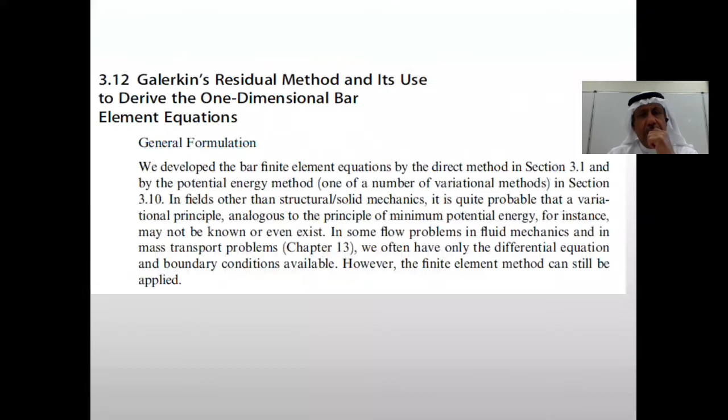Did we do part 5? No, I think I need to first do that one, and then I'll come to this presentation.

So can I stop share here? You don't need to stop share. Huh? You can just go ahead and share the other one. Okay, go new share. No, don't do it. You just exit this one and open the other side. How do you exit it? Escape, just escape, and then minimize this one.

And then where's PowerPoint? This one? No, this one. Yeah, this one. No, this one. No, this one is the one that is, no, there. This is not the one. Click this, click the one on the left. Yeah, this one? Yeah.

That's it for five. MashaAllah. Did we talk about this? A little bit, yeah, we did. Yeah. Okay, back to track. Okay.

So here, I think we need to set the structure. It is defined as nodes and members, and therefore everything is related to the nodes. So you are seeing, or you are searching, what's going to the node. If you have a node like this in the structure, basically you have to choose what are the nodes. This is what I call modeling. You are modeling the real structure by an element with 2 nodes.

And everything is coming here, so you are not worrying too much about here. You are worrying what happened to node 1 and what happened to node 2. That's all. So this load, you have to know how much of this load will go to node 1 and how much of this load will go to node 2.

We did this last time and we have an equation for it. Do you remember this? N transpose times the function of the loading, and you have to integrate between 0 to L, right? And now you will tell me how much will go to node 1 and how much will go to node 2, because if you can see this one here...

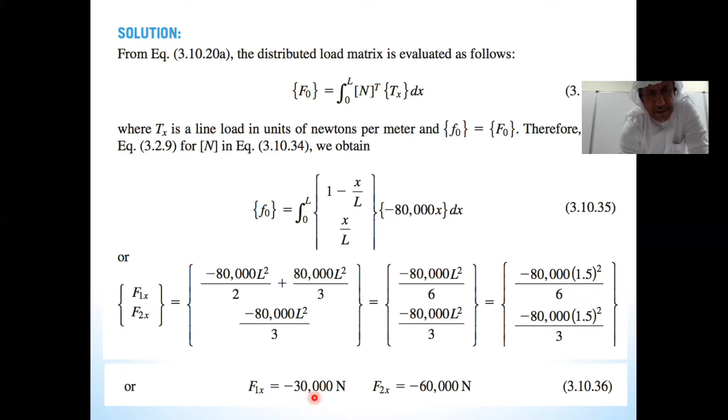So we want to solve for stresses using one element, which is a crude approximation. Not everything, anybody will give you a structure, you go and use one element, right? You are assuming, instead of beam, that you have only two nodes. What is this? No, this is not right. And you will see the answer. So we are modeling the whole cantilever by two nodes connected by a line.

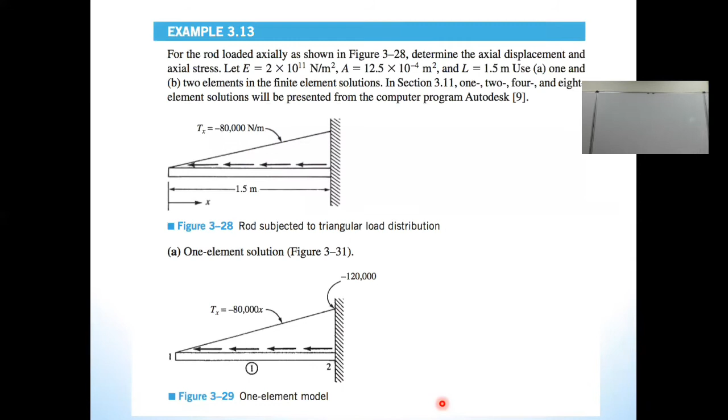So let's see, this is the load. Now what do you need to do? You need to find the stiffness. You have to go to the equation, right? What's the equation? K, right? Is it K? F global equal K global.

D, U1 and U2. That's it. Now, how many nodes? Two nodes. It means this is 2 by 2. This is 2 by 1. Very simple, it's just like one element.

So what is the stiffness? The stiffness, you know what? E A over L, 1 minus 1, minus 1, 1. And we substituted and we found this. Is this correct? The upper part, I'm talking about K1. Is this correct? Yes, okay.

What about the force? If this is node 1, and this is node 2, and this is a triangle, I think this is your X. I think the load is moving in the negative direction. So we already know how much the load at node 1 and how much the load at node 2 after integration. And the load should be here. This one is F1x, right? And this one F1y, F1, F2x.

Okay, how much is F1x? Minus 30, minus 30,000, and the other one is minus 60, right? Okay, minus 30 because x is positive here. So this one here is 30,000, and this one is what? 60,000. But since there is a fixed support, there is a reaction, right?

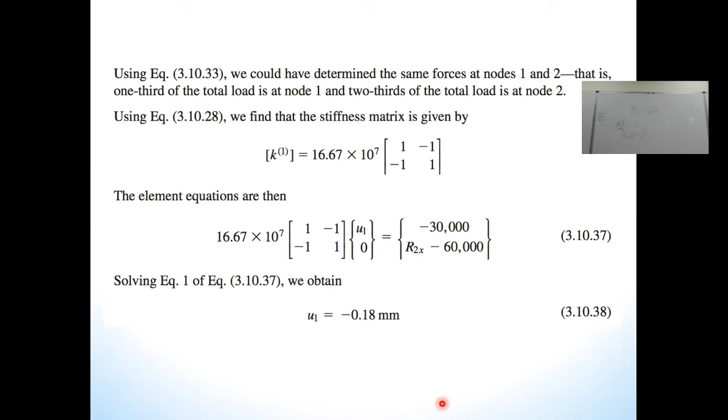The load. So this is the contribution of the load, node 1, contribution of node 2. And of course, U2 is 0. You agree U2 is 0? Yes. So how many unknowns here? We have two unknowns, right? Or one unknown? Two unknowns. But you want to solve for the primary unknown, which is what? U1. Forget about reaction. So for U1, you just multiply this row by this column equal to minus 30 and solve for U1. Go substitute U1 and find the reaction. Okay?

How do you calculate stresses? Now you found the reaction. Okay, we are interested in stresses. Do you know stresses? Yeah. Stress, which is a scalar, equal E times epsilon.

E, what is epsilon? We said you have to remember B times what? Times D, or U vector D, displacement. Okay, this is a scalar. This is scalar. How do you make the product of this a scalar? B and D, one has to be a row and the other one has to be a column. So this is why, B, what is B? The derivative of the shape function.

From now on, that's until the end of the semester, if I say B, you will say derivative of the shape function. So it's E, the derivative of N1. Do you know what's N1? N1 is what? 1 minus X over L? And N2? X over L. So what's the derivative of N with respect to X? Minus 1 over L. And the other one is 1 over L.

And now, what about the displacement? U1 and U2. This U2 is 0, so you multiply this row by this column, and already you found U1 from the previous slide. You put it here, and you get 24 megapascal.

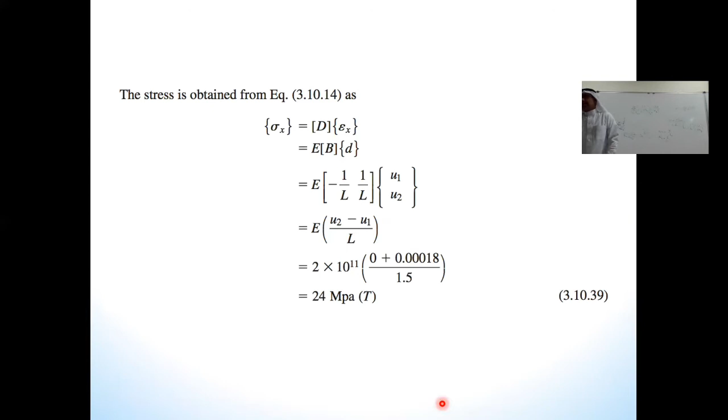This 24, the stress in the cantilever, it doesn't make sense, right? If you have a cantilever, and you said that this will go bending like this with the load. First of all, we are assuming that the stress is uniform. The stress at the free end is the same as the stress at the fixed support because you use one member. Does it make sense? This is crucial, right? We know that the cantilever has maximum moment here. So the stress here is higher than the stress here. If you plot bending moment, this is from strength of materials, sigma equal minus M y over I, right?

So the maximum stress will be at the fixed support and minimum will be at the free end. How much do we have? 24, and it is tension.

Now, how do you improve the answer? Take more elements. So what is your next step? Two elements? Divide into two elements? Let's divide to 2 elements. Let's see what would happen if we divide this to 2 elements.

Okay, here is 2 elements. How many nodes? 3. So your K will be 3 by 3. Very simple, but now you have to understand that the length for each one is 1.5 divided by 2. So we first obtain the element force.

Can you tell me what would be the force in node 1, node 2, node 3 now? It would be different now. There are 2 functions. For element number 1, you have to use this. For element number 2, you have to use this. This is one function, and this is one function.

And you have to integrate from 0 to L, which is 0.75. And the other one will be from where? From 0.75 to 1.5. Are you sure? Not from 0 to 0.75? No, already done it, Sasha.

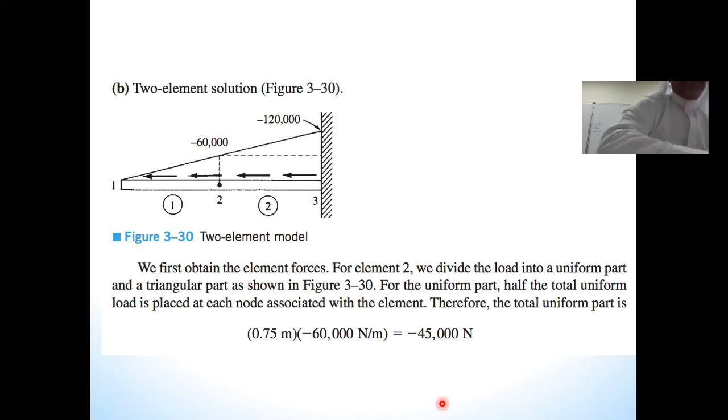Okay, if this is what you say, let us see. Now, what is this? Can you tell me? It looks hard to understand, but you see, the load at node 1 is minus 7,500, and the load at node 2 is this plus this. Anybody can tell me what's happening here?

No idea. No idea. Anybody? Give us 5 minutes. You just take the distributed load. This is statics, CE 201.

You just take the resultant and throw it to the node. So you come to this element and put a triangle. You come to this element and put a trapezoid, right? This one is 30,000, because this one is 60,000. This is 60,000, and this is 30,000. Is this correct? Yep, 60,000.

The length here is what? 0.75. The length here is 0.75. This is node 1, this is node 2. This is node 2, and this is node 3. So at node 2, there would be contribution from element 1 and from element 2.

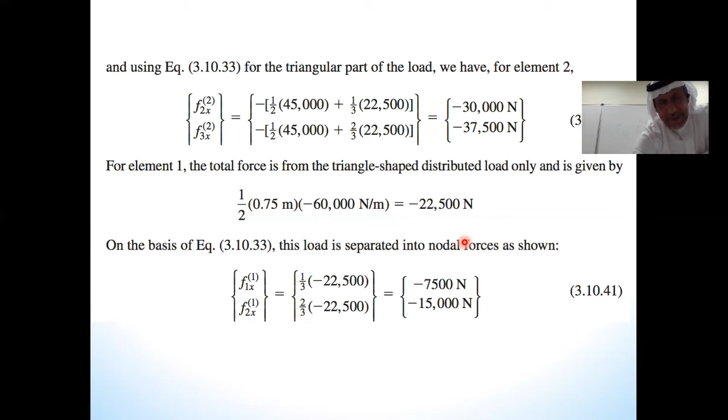For the triangle, 1/3 and 2/3. That's exactly what's happening here. Look at the bottom. 3.10.41. Did you see 1/3? Did you see 2/3? What is this? This is the total load, 22.5.

The area of the triangle: half of the base times the height. How much? 22,500? Half of 0.75 times 30,000. Is it 60,000? What? 60,000? 50,000? It's not 30,000.

60,000. Where is it? Oh yeah, 60,000. And 120. 60 and 120 there. Where are you? You should tell me if I make a mistake, right? 60,000, right? Yeah, right. 120?

No, 60,000 times 0.75 divided by 2. Is it going to be 20? Yes, yeah, okay, makes sense. Okay, thank you. So 1/3, 2/3, we already know it.

So what are the loads here? Is it to the right or to the left? To the left. Okay, what about here for node 2? To the left. Reaction, right? Yeah, reaction. Okay.

How much did you say? How much here? Load. How much for node 1? Minus 7,500. Okay, this one: minus 15,000. 150? No, 15,000. This one: 30,000, minus 30,000. You understand?

I don't want to go to these trivial things. Come on, right? 60,000 times 0.75 divided by 2, and then 1/3 of this. So how much total here? Minus 30,000. No, without minus.

I know it's to the left. How much? 30,000. Okay, how much here? 37,500. 30? 7,500. 7,500. 37,000? 37? Yeah.

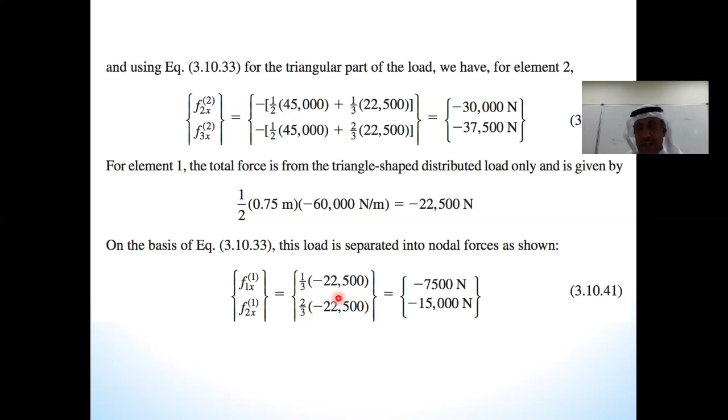Go ahead. Okay, great. Thank you. So this one here, wow, this is exactly what we have on the board. You see, F1, F2, contribution from, and this one is the reaction, and this one. Okay, look at K1 and K2, they are the same, and you get K.

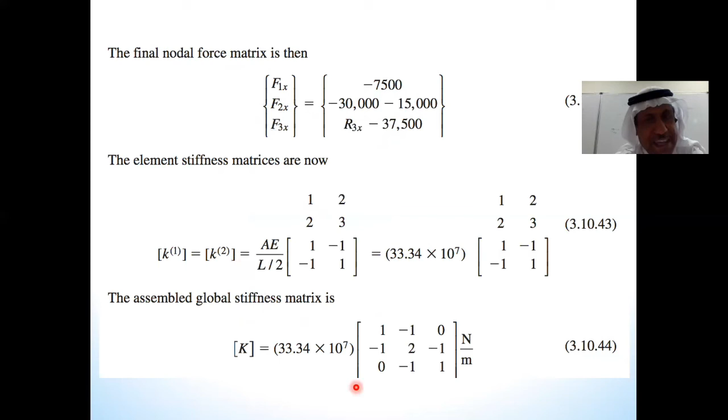Finally, we got this: K times U1, U2, U3 equals the forces, right? Can you find the unknown U1 and U2? Okay, you take this matrix, is it? Which one? This matrix?

Partition, take this one: 1 minus 1, minus 1, 2, times U1, U2, equal to this and this. No reaction involved. You solve for U1, solve for U2, then you can find the reaction. Okay, how do you find the stresses?

Now we have two elements. I need to know how much the stress is in element number 1 and the stress in element number 2. How do you find it?

Okay, tell me. All you need is U1, U2, U3. U3 is 0. Can you tell me how much U1 is? Minus 0.18. Yeah, and the other one? Minus 0.75... 0.1575. Okay, how can you find sigma 1, sigma at element number 1?

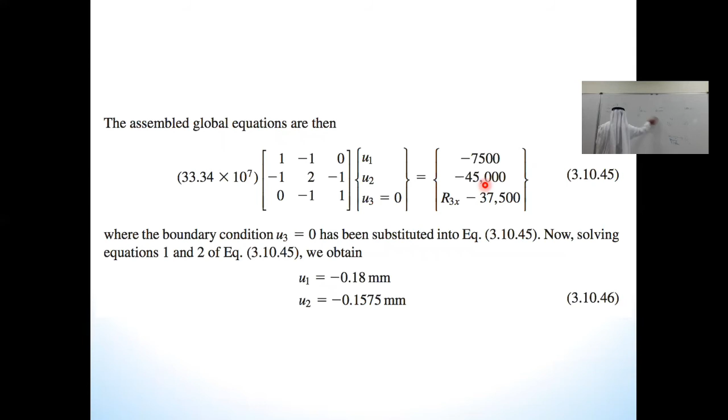We just erased it. Sigma equals E times epsilon. Epsilon equals B times the displacement. Okay, for element number 2, sigma for element number 1 will be E times epsilon of element number 1. It will be E times B times D.

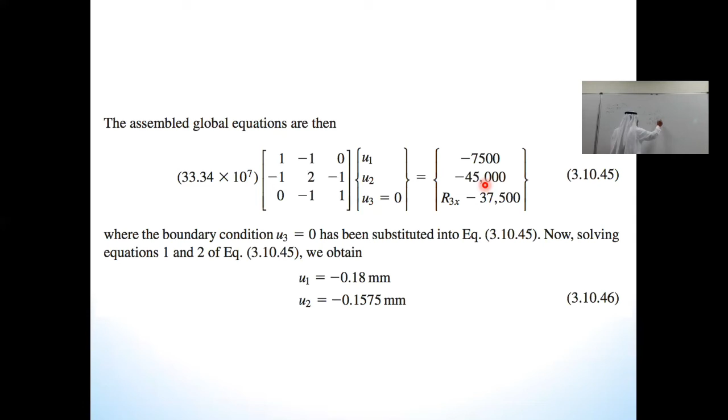Okay, this one will be E, and this we already know: 1 over L, minus 1 over L. Now what about the D? U1 and U2. Exactly, U1 and U2. That's it. What is L? L is 0.75. That will give you sigma.

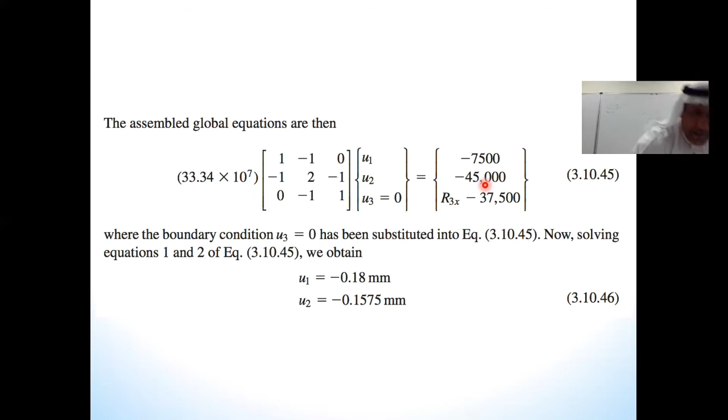Can you repeat this for element number 2? U2 and U3. Okay, let's see the stresses. You must be anxious to see what happened to the stresses. Wow, stress in element number 1 is 6, and stress in element number 2 is 42.

How much was it when we used one element? 24? Average them: 6 plus 42 divided by 2 is 24. But it is better, at least for element number 1, instead of 24, 6 is smaller than 24.

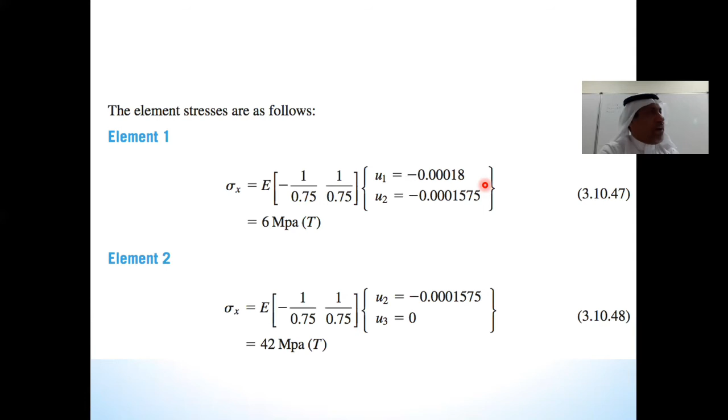And as you go toward the support, which is element number 2, it is getting higher, 42, instead of 24. Oh, what do you want to increase now? Yes. If we increase the elements, it would be even more and more accurate.

In fact, the stress here, if you plot it, will be curved. At the tip it's 0, and it's going like this. This is the fixed support.

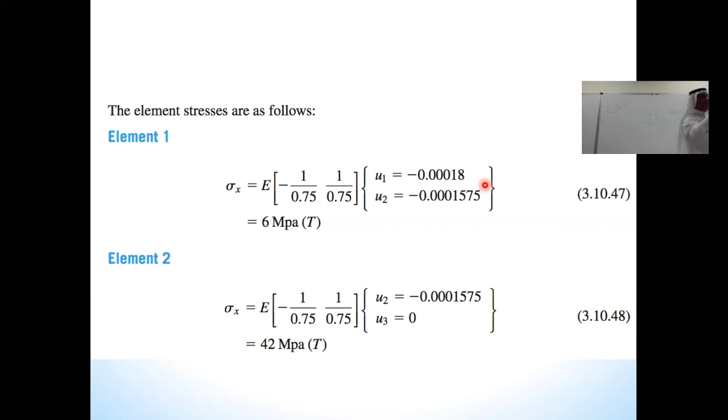Remember, for one element, we got 24. For 2 elements, we get 6 and 42. At the end, we want to see stairs, right? Like this. If you divide it into many elements, you are going to approximate this parabola by piecewise segments. Do we have that? Yes, we have it.

So even in software, when we use a large mesh, the triangles become like a stair instead of a triangle. So when you use a mesh, it means you are increasing the number of elements. If you make the segments bigger, you end up with a stair instead of a triangle. So it's better to use a finer mesh.

Okay, now I ask you to go to COMSOL or Abaqus and run this problem, and you get very good colors. How do you check if your answer is correct?

Use your sense. My sense is okay. My sense says this is okay, and then I'll shake my head—this result is so good. I'm glad. Don't use your sense. You have to.

Logic sense. No, but he is right. If you get high stresses at the tip, this doesn't make sense. You know how to expect that the stress will be higher and higher as you go. But now you'll ask the quantity, the values, whether they are correct.

How do you check your values? You have to go to closed form analytical, and you compare analytical with the numerical. And for cantilever, you know how to do it.

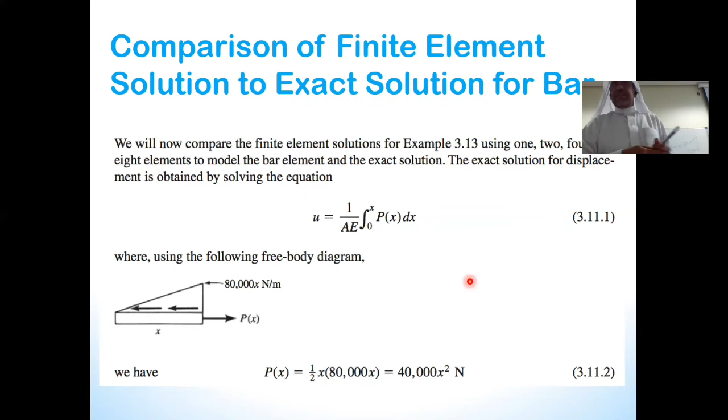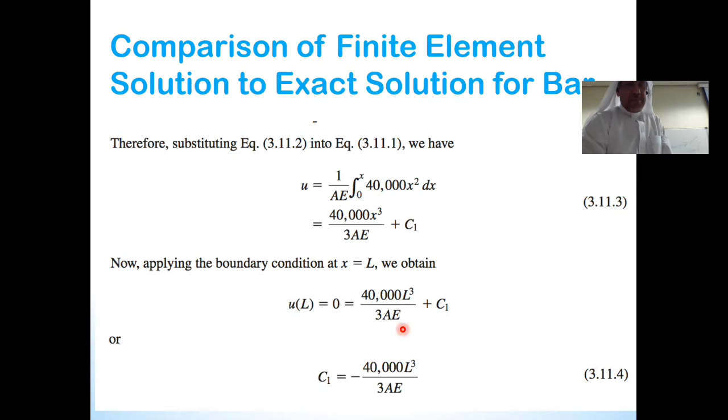When you integrate, you have to have a constant, and the constant from the boundary condition. Already you know the displacement at x equal to 1.5 is equal to 0. He's integrating and he's putting C1. And it says here, the condition at x equal to L, U equal to 0. He found C1, take C1, put it back here. Then you will have U as a function of x.

See? Look at U, this is U closed form. And this is the stress closed form. This is the analytical result for U and for stress, which is changing with x.

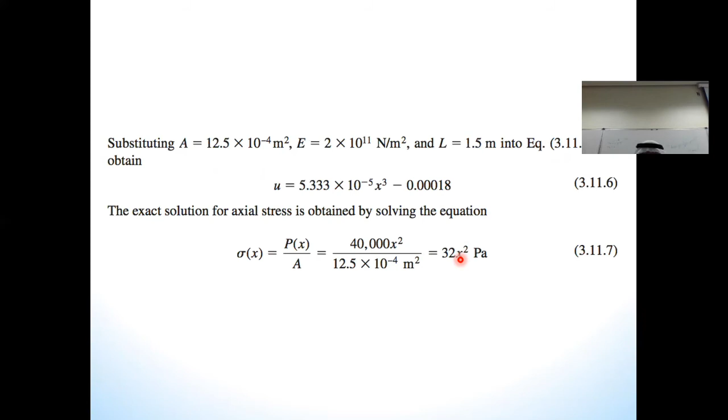Okay, now let's go to finite element. Let's draw for finite element when we have 1 element, 2 elements, 4 elements, 8 elements, and we see how closer we get to the exact. We will call this the exact solution. The analytical, let's call it the exact solution. Wow, look at here, what is this?

Displacement in meters. Okay, when you use one element, it gives you this curve. What does this mean? It's linear. Okay, if you use 2 elements, it will be bilinear.

When you use 8 elements, you are approximating the curve with piecewise, right? But look at the exact - exact is what? It's a curve, parabola, x cubed, right? So which one do you think is a good solution? It's not good compared to the analytical one, okay?

Yeah, because this is crucial. The first one, you are saying that the contribution is only 2 nodes. The second one, you are saying the contribution is maybe 9 nodes, okay?

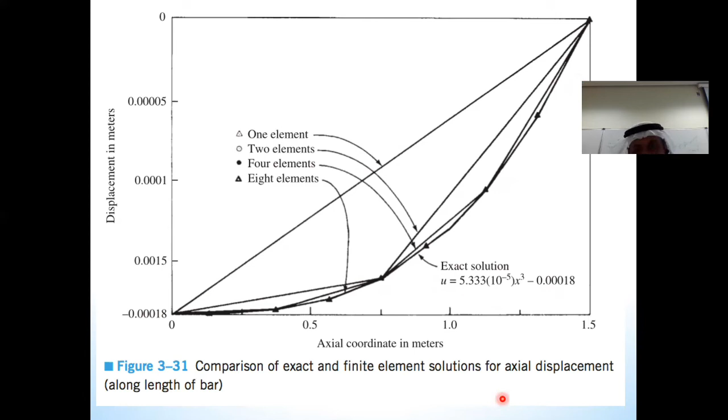Very interesting. So 8 elements is good? You think 8 elements is good? No, we have to go more. We have to go more than 8?

The finite element solution matches the exact solution at the node points. It's satisfied there, of course with the boundary condition applied. The reason the nodal degree of freedom values are exact is because we use that approach.

Although the node values for displacement match the exact solution, the values at locations between the nodes are poor, using finite elements for 1 element and 2 elements. We see the departure from the exact solution.

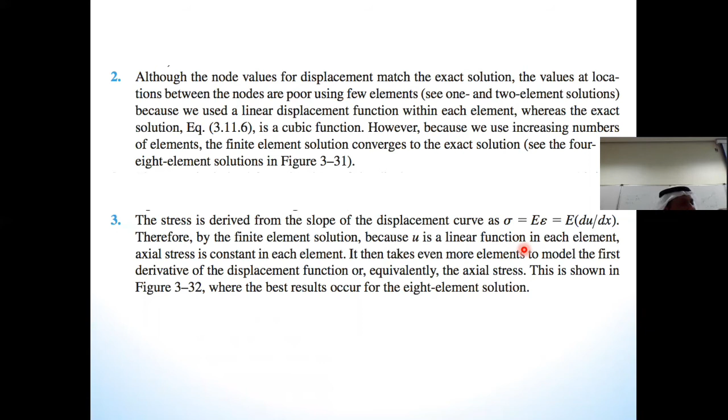The stress is derived from the slope of the displacement curve. By finite element, because u is linear, what is the derivative of u? Constant. That's why stress is constant, because u is assumed linear. For this element, if you use 1 element, the displacement is linear. If you choose to divide into elements, it's linear over each element - linear here, linear here, linear here.

This is very, very important - it gathers everything. When you use 1 element, you see stress is 24 for 1 element. How much is the length of the element? From 0 to 1.5 - this is 1 element.

Where is the 2 element case? Did you see the 2 elements? Yeah, and this is 4, and this is 42. Okay, 8 elements - 1, 2, 3, 4, maybe 5, 6, 7, 8. Very good, 8 is the dot here - see the dot, the circle?

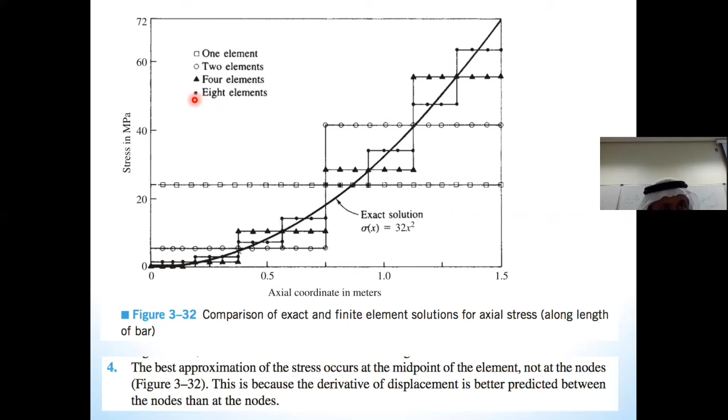So 8 elements - is that good? Not good, not good. So you have to go to maybe 16.

Over. Sorry, the problem with running the software - it will take time. But you want to solve the problem, right? It will take more time, but if we go more and more, like 16 elements. What about your project? You're not going to solve just a cantilever - you will solve a problem that might take overnight calculation.

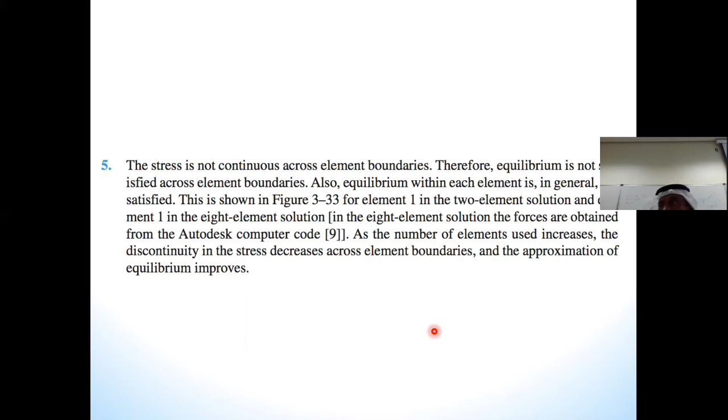Wait until you graduate and finish this course. This is just a simple example, right? And this is using linear elastic analysis - you're not going into non-linear.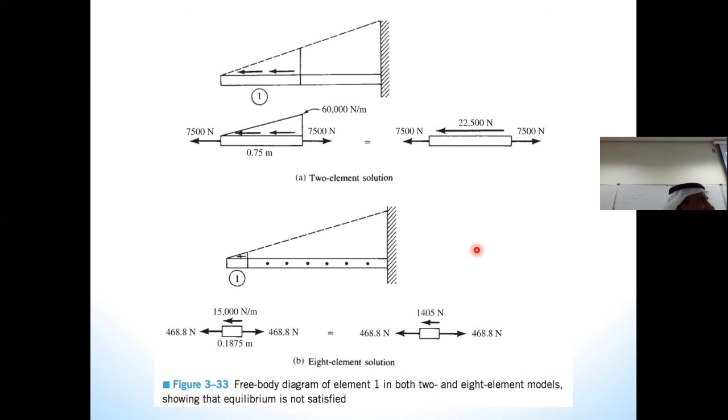Now suppose you're working in a company and they have a problem in a machine and they say come analyze it. You go to COMSOL or Abaqus and make a model. You say, I learned this from CE 517, and you do your analysis and show it to your boss. Your boss asks what kind of analysis you used. You tell him you used elastic analysis. He says, how come? There's a failure there - it already goes into the plastic range, plasticity. You have to include plasticity, because you're outside the elastic range.

Now what about the software - do they have that? Yes, they have that. Do you understand plasticity? Where did you take plasticity, in 510? If you say no, I can offer a course called plasticity, because my PhD was in plasticity. I'm mechanical - almost half mechanical, half civil. I used to offer this course about plasticity.

Not only plasticity, I can model this as damage. Have you heard about damage mechanics? Fracture and things like that - you can model the material damaging. Every time you put a load, you damage part of it, you create voids in the element, and as you create voids you make it more damaged. It accumulates. These are advanced topics.

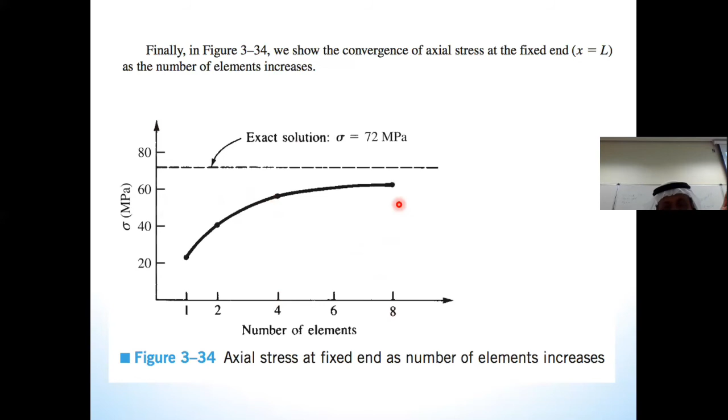Okay, so we'll take attendance today. We have 4 elements. When you have 4 elements, we have 60, and with 8 elements, still 8 elements, it's close, but it's not that close.

Okay, what is this here? It's equilibrium, right? This is for when you choose one element. This is 0 here, and you want to draw free body, but this is very important. Whenever you calculate stresses, you have to make sure that your element is in equilibrium, because if it's not in equilibrium, you will have a problem. This is kind of a check for your answer and your result. Convert stresses to forces and isolate the element and see if it is in equilibrium, okay?

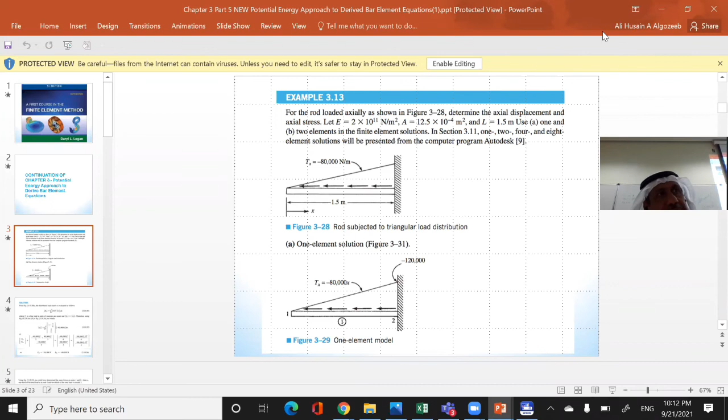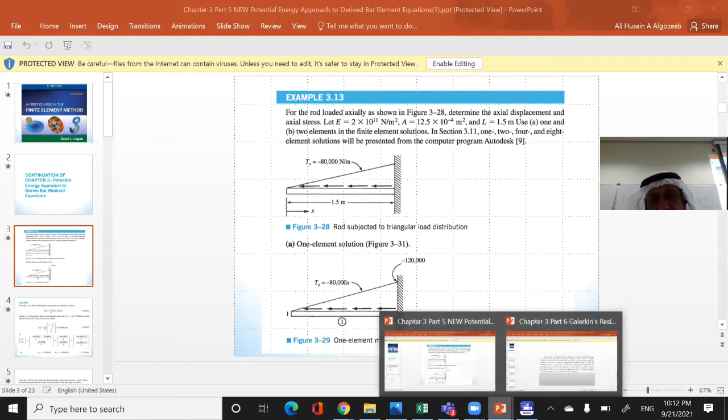Now let's move to something else. What should I stop share, so that I can continue? I can continue, so I just come here and click on this one. It's sharing the entire screen, not the window. Is this the one? Yeah, this one? Okay.

This one is very interesting. What are the 3 methods to calculate the stiffness? One of them is the direct method. The other method is, potential, pi with u1 and pi with u2, and then you find 2 by 2. What's the third method? Galerkin. This is what we want to do tonight. We want to derive the stiffness for the bar element using the Galerkin method.

And I think you know the answer. What's the answer? What's the stiffness for the rod? K will be EA over L, 1 minus 1, minus 1, 1, like that.

Now, although the Galerkin method we are going to do it for the rod, we are going to use it to derive it for the beam. If you understand it now, you will have an easy time. Very important, and normally it comes in the exam, the Galerkin method.

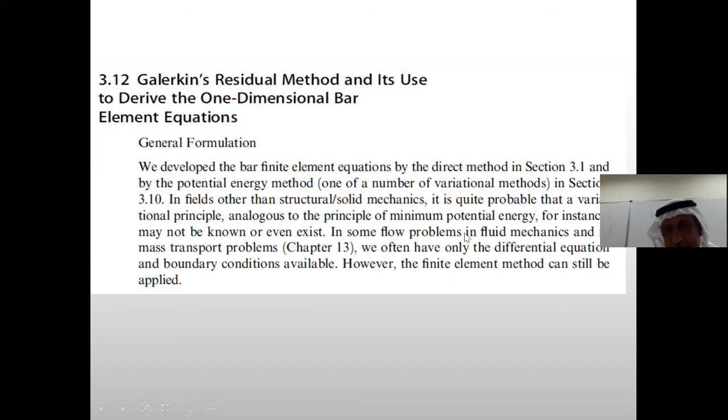So they have to use other methods. What is the other method? Exactly. You see, in some flow problems, what is the water? In flow, porous media, the movement of oil in the rocks, okay? All of this is a flow problem. So in flow problems, fluid mechanics, and in mass transport...

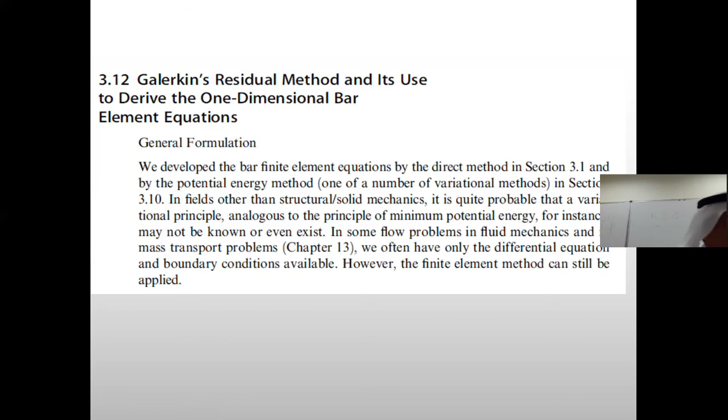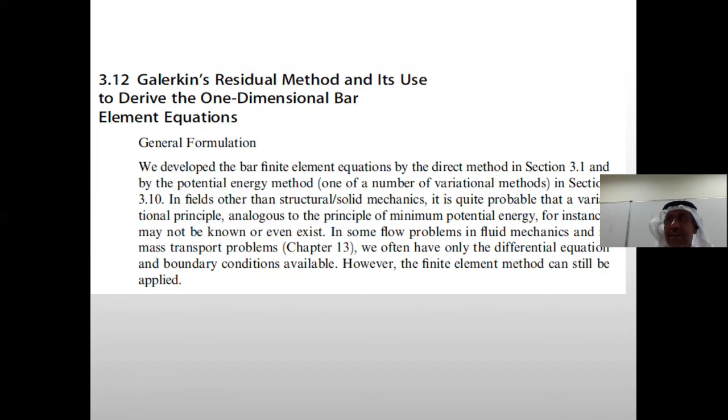like heat transfer. Okay, do we have mass transport in civil engineering? What is it? Traffic, okay. What else? Evaporation of the concrete, right? Chloride going inside, corrosion. This is called mass transport.

So in mass transport, I'll give you, okay, give me potential energy for mass transport. There's no potential energy. There is only differential equation. So how to get the stiffness? You have to use Galerkin method. See how powerful it is? You cannot escape from it, right?

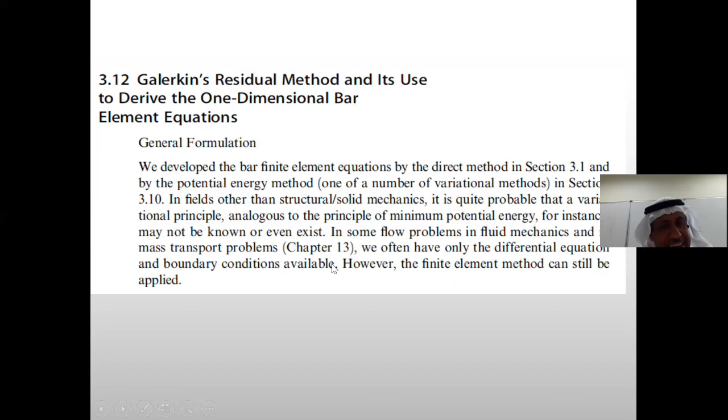You cannot escape. We often have only the differential equation and boundary condition. However, the finite element method still applies. The method of weighted residual applied directly to differential equations is used to develop finite elements. In this section, we describe the Galerkin residual method in general and then apply it to the bar.

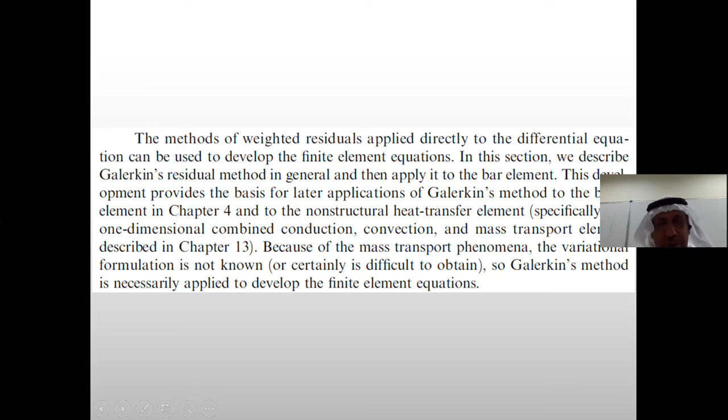So we'll explain it in general and then we have an example. Okay, if we can get EA over L times 1, minus 1, minus 1, 1 tonight, we'll be happy. The development provides the basis for later application of Galerkin method to beam elements in chapter 4, and to the non-structural heat transfer and mass transport elements in chapter 13.

Because of the mass transport phenomena, the variational principle is not known, so Galerkin method is necessary to apply for the development. You understand now why Galerkin method is important? Yeah, okay, because in some cases we don't have it. This is it. Everything is in this slide.

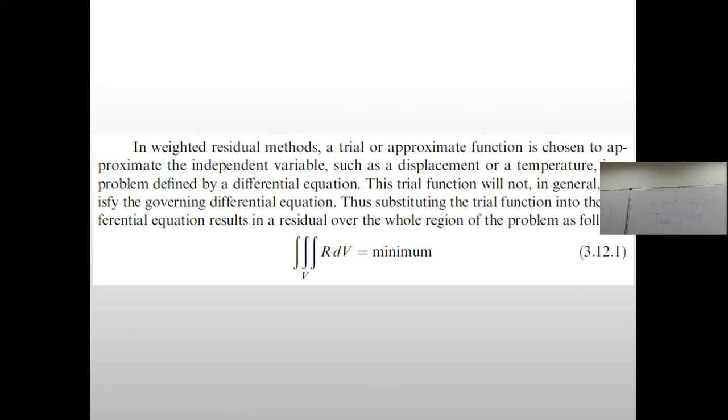You see the residual R, the one I put on the board? You have to integrate the residual over the volume and make it equal to 0. It's true that R is not 0 because you put in the approximate function. But now take the residual here, integrate over the volume, and equate it to 0. That will give you the stiffness. So you are looking for the stiffness which will make the error over the whole volume equal to 0. It may not be equal to 0 over a small element, but over the whole structure it will be equal to 0. So what is this R here?

Okay, so let's read this, please. The weighted residual method: a trial or approximate function is chosen to approximate the independent variable, like u bar.

It's not exact, such as displacement or temperature in a problem defined by differential equation. The trial function will not in general satisfy the governing differential equation. Of course, there is an error. Thus, substituting the trial function, U bar, in the differential equation results in residual R over the whole region. Take this R and you have to make it minimum.

One of the conditions to make it minimum is to put it equal to what? 0, right? You see, when you put it equal to 0, then that's it. That's Galerkin method.

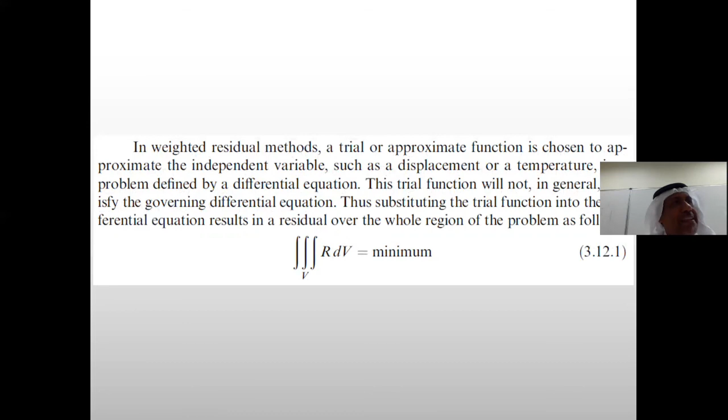Okay, in the residual method, we require the weighted value of the residual. What's the difference between this one and this one? Did you see anything? Ah, the W, right? Did you see it? Here, not there. Here.

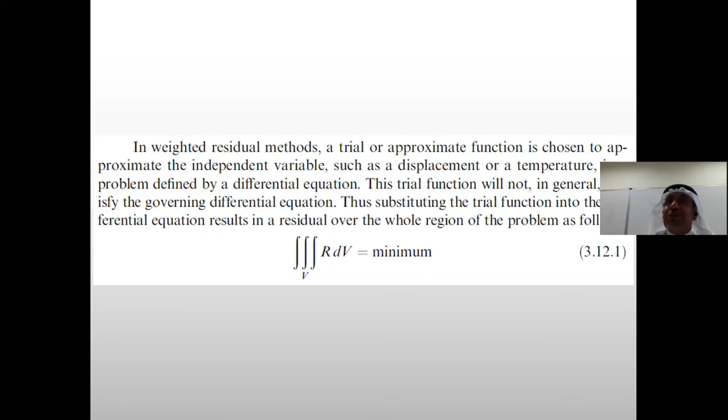This one has no W. This one, you want to minimize the residual over the volume. But to make it 0, you cannot just simply take minimum and put 0. It's not up to you. You just put 0 -- you have to do some work. You have to multiply it by W and then put 0.

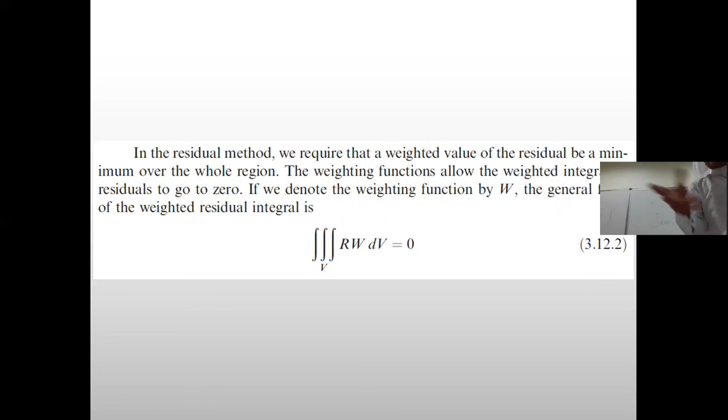What is this W? This W is weighted function. Weighted function like alpha, beta, gamma, weighting. Just like interpolation function -- you remember the interpolation function? Yeah, that's it. This is like interpolation function. This W is not necessarily scalar. It can be a function of space, function of X.

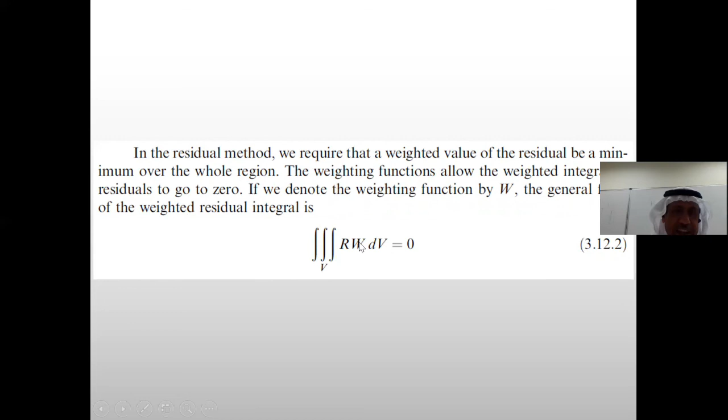So, still we don't see Galerkin. We only see the concept, right? Using Galerkin method -- Galerkin method says, okay, I am going to put instead of W, which is the weighted function, I'm going to put the shape function. He's so clever. He said, why don't I use N1, N2? That's it. So this equation becomes like what?

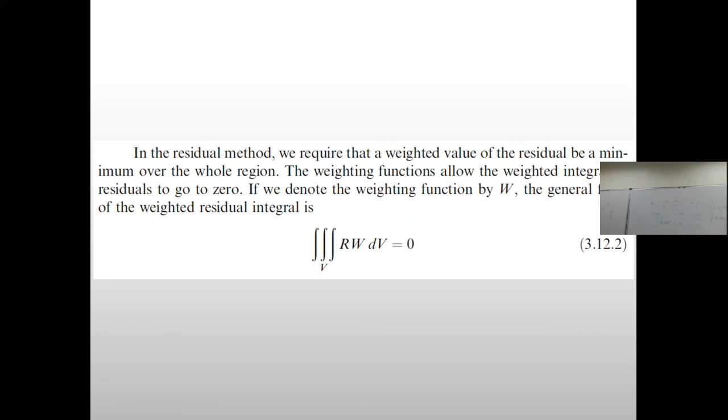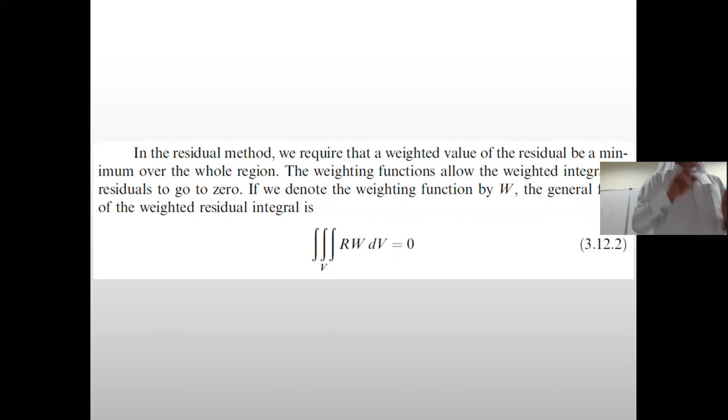2 equations, because you can integrate R N1 dx from 0 to L, this is equal to 0, and then R N2 dx equal to 0 from 0 to L, that will give you another equation. And then you can generate the stiffness, okay? Because this one here is Wi, which means for each node. So you are going to make minimization of the error at each node to be equal to 0.

And he said, okay, using Galerkin method, we choose the interpolation function, such as this in terms of, instead of W, Ni, which is the shape function. And already you know the shape function, 1 minus x over L and x over L. Okay, and look here, he says R Ni, i equal 1, 2. It means 2 equations, right?

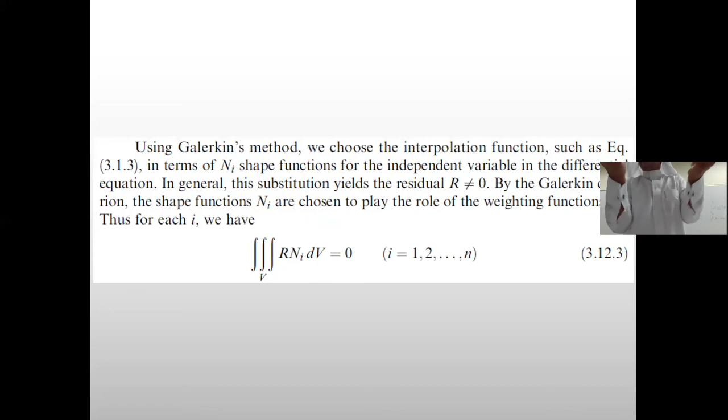What's written on the board is 1, 2, 3, depending on how many nodes, okay? So it means if you have a structure with 100 nodes, it will be 100 equations. But for one element, it will be 2, right? For the rod, because you are talking about the stiffness of the rod with 2 nodes, right?

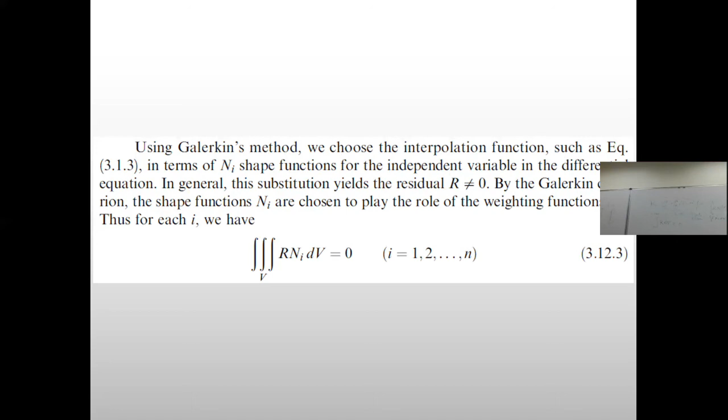So this one here, you are going to minimize this not over the whole structure, but over the element. You are minimizing over this element, minimizing over this element, minimizing over this element -- independently. And therefore, this is why you have stiffness here, stiffness here, stiffness here.

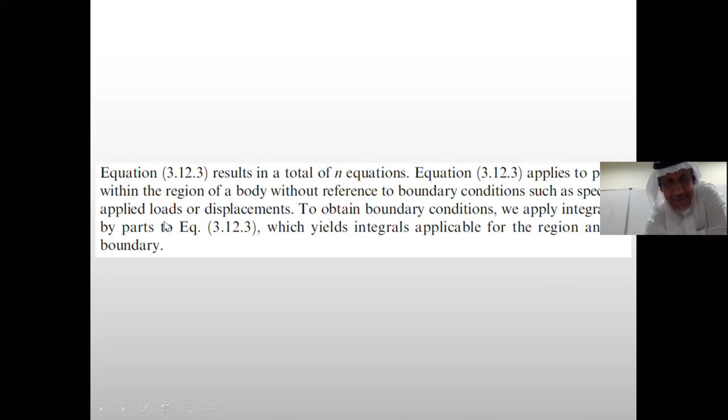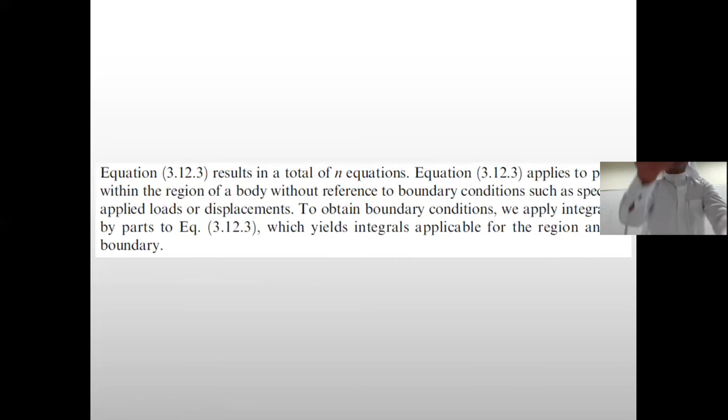This equation results in a total of n equations. In our case, it results in 2 equations applied to the node. To obtain the boundary, we apply integration by parts. Do you know integration by parts? Yes. By the way, Galerkin method always uses integration by parts.

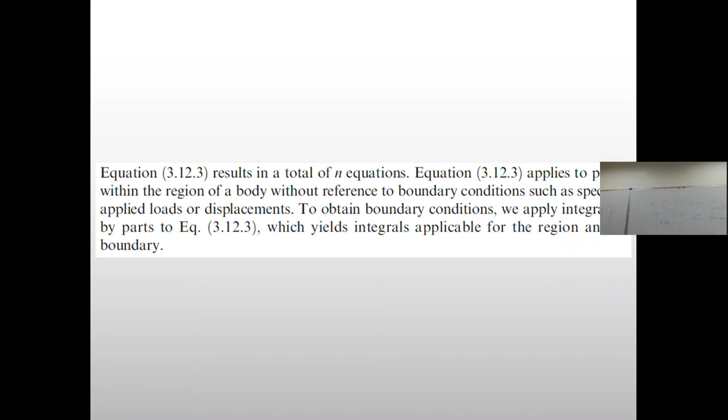Because why do you have to integrate by parts? You have to have the differential equation, and when you integrate the differential equation, you reduce the order, right? If it is dy dx and you integrate it, it becomes y, right? So this is why you have to do integration by parts -- so you reduce the order.

What is A? What is du dx? Strain -- take strain multiplied by E, epsilon, right? Strain times E is what? Sigma. Sigma times A is force. In the rod, the force is constant. So when you take the derivative of the tension force, it should be equal to 0.

MashaAllah, see how they find a differential equation for the rod? This is the tension, T. If you have a rod with this node and this node, truss element,

tension here equal constant, such that dt/dx equal to 0. The derivative of a constant value is 0. This one here is t. You take the derivative, it will be 0.

Okay, let's do integration by parts. That's it, do it, okay? Integration by parts, so that's it. U dv, we separate it. U will be N_i, and dv is this. This is what you have inside the integral. You have this quantity and this.

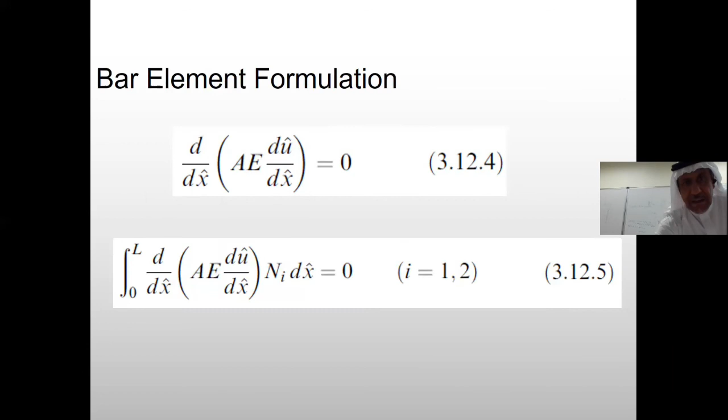Is that right? That's what you have. Okay, let me convince you again. See? Which one is u? N_i. And dv will be d/dx, EA du/dx, dx.

Okay? So if you integrate by parts, look, if you integrate by parts, what happens if you integrate by parts? You have to equate it to 0. It means what? U dv equal to 0. It means uv minus integration of v du equals 0.

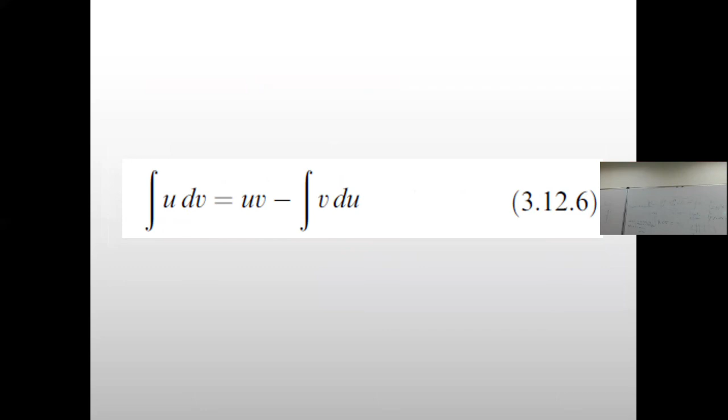Integration of u dv should be equal to 0. So it means the right hand side, uv minus integration of v du equals what? 0. Yes, it's equal to 0. So this one here is uv minus integration of v du. Okay, how many equations is this?

How many equations is this? Watch the I. The I, we said, means how many equations? 2 equations. Did you see it here? Not here, it's here. So this is I. This one will give you 2 equations.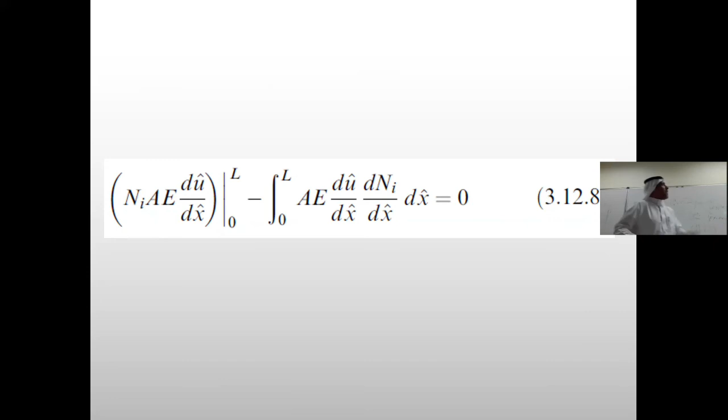Can you tell me the first term, how it would be for node 1? Just tell me what would be this for node 1, and then I will finish the rest. So what do you do? For node when I equal to 1, you replace I by 1. Okay, replace I by 1. So it will be what?

N1, EA, and then what? du dx. But u, we said du. What is u? U is N1 u1 plus N2 u2, right? And then what? And then we put the limit from 0 to L.

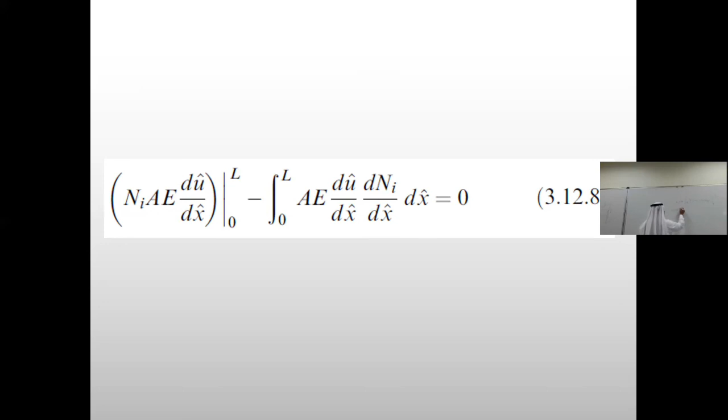Okay, N1 EA. Can you take the derivative here? It would be the derivative. U1 is not a function of x, U1 is an unknown value. It will be dN1 dx. You already know the derivative of the shape function. So it would be what?

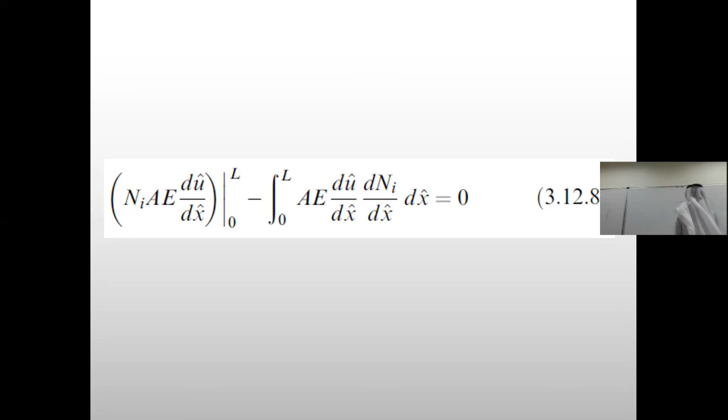Minus 1 over L, U1, this one plus 1 over L, U2, right? And this from 0 to L. Yalla, evaluate. Can you evaluate?

Put L. Can you put L? The first, how much the value of N1 at L? 1 minus 1, 0.

How much the value of N1 at L? 0, because N1 is varying like this. This is node 1, this is node 2. It has a value of 1 at node 1 and has the value of 0 at node 2, which is L. So the value of N1 at L equal to 0. So you are multiplying 0 by all of this, it will be 0.

Minus, now put the other limit, 0. What is the value of N1? 1. EA. Then can I put minus 1 over L and 1 over L, and I put U1 and U2? Can I put it like this?

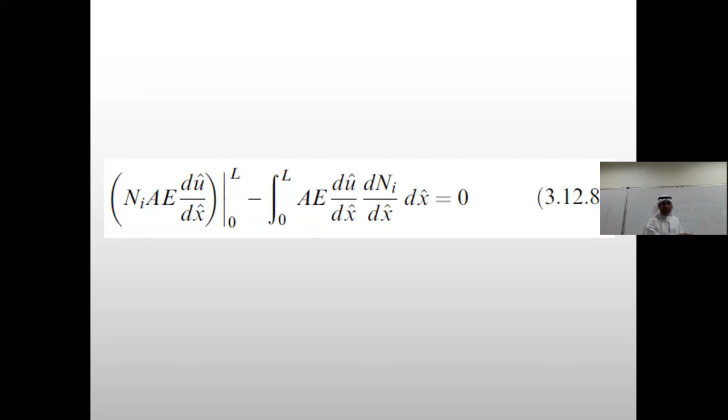Okay, have you noticed something? There is EA and there is L, which we will put outside. And there is 1 here and minus 1. Okay, let's see what happened to these equations. So you see, that's exactly what we have. So when we do this and put the limit, we get this equation here.

So N1 equal to 0 at X equal to L, N1 equal to 1 at X equal to 0, so we get this equation. What is this equation? This is for N1. Can you repeat things for N2? You just put here instead of N1, N2, and instead of N1 here, you put N2. You get another equation like this. Where is it? It's here.

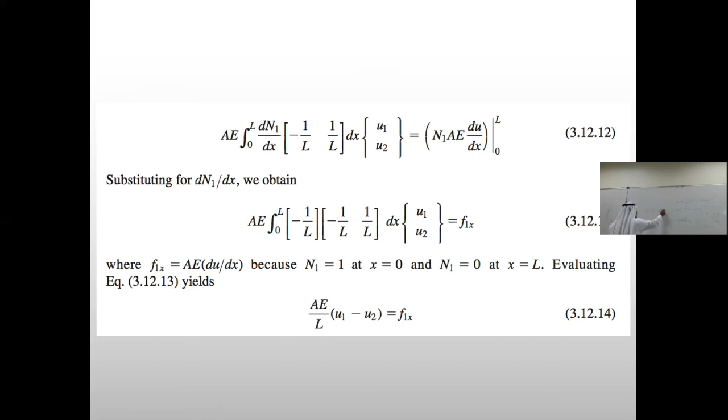Okay, let's put the first equation. So from when you put N1, can you tell me what is this one here? That is not N1. AE over L, EA over L, U1 minus U2 equal F1X. Okay, what about if we put instead of N1, N2? Okay, EA over L, U2 minus U1, F2X.

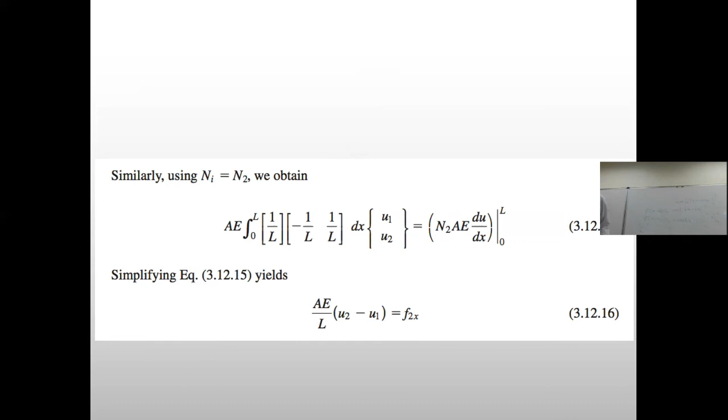Okay, can you put it in a matrix form? F1X, F2X equals something times U1, U2. What? 1, minus 1, minus 1, 1. Is that right? Do you agree? He's right. Okay, good. So we got it.

Let's see. Very good. So how many minutes do we have?

This is the other ones, the other methods. Here we integrate what? We take the residual. We said minimization over the volume, that is what is called Galerkin.

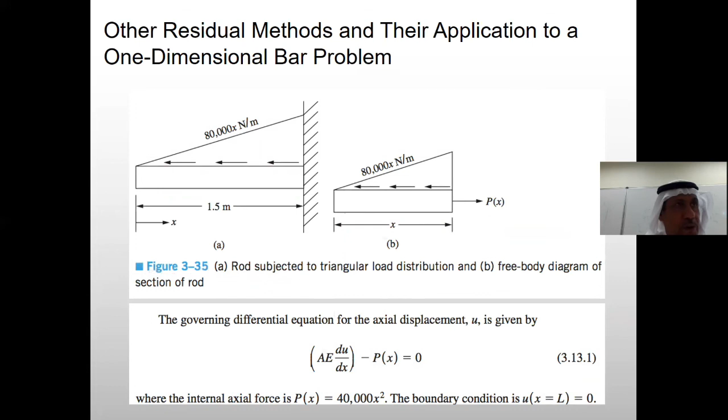There is another method, it's called... you see this one here, you are going to use collocation method, where you are going to satisfy it at a certain point. We'll talk about it next class. I don't want to rush it, but it is easy.

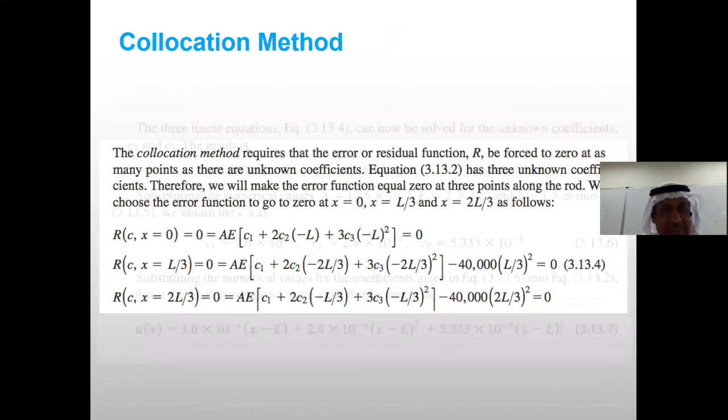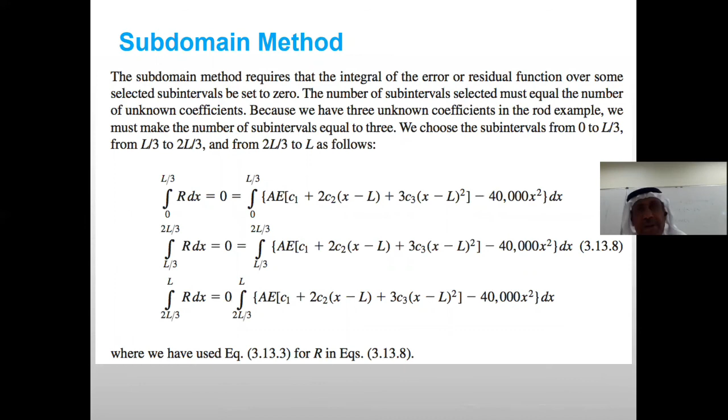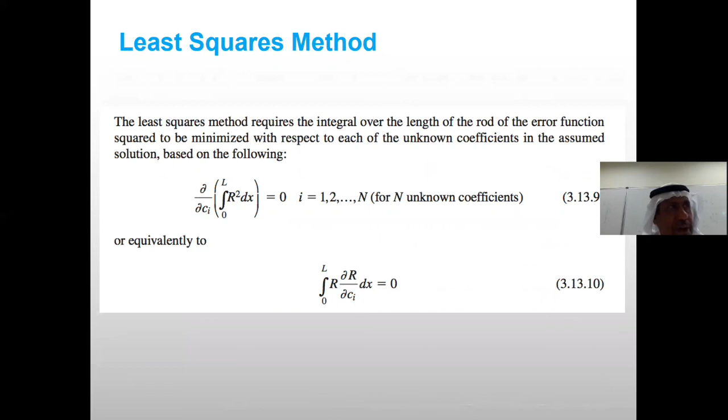So we'll talk about this, but the most important, and then least square. Have you heard about least square method? It's a numerical method, we will use it here. Anyway, forget about this other method, I have to review it after you come back from the break.

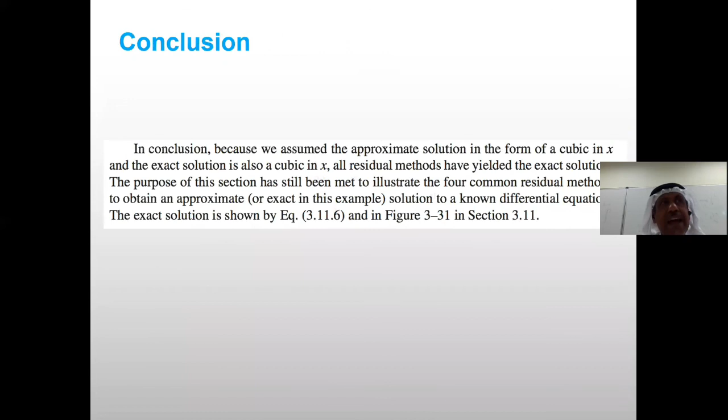Galerkin method is so powerful, right? It will be powerful when you go home and read it again. Yeah, I know, you only get 30% of what I said, right?